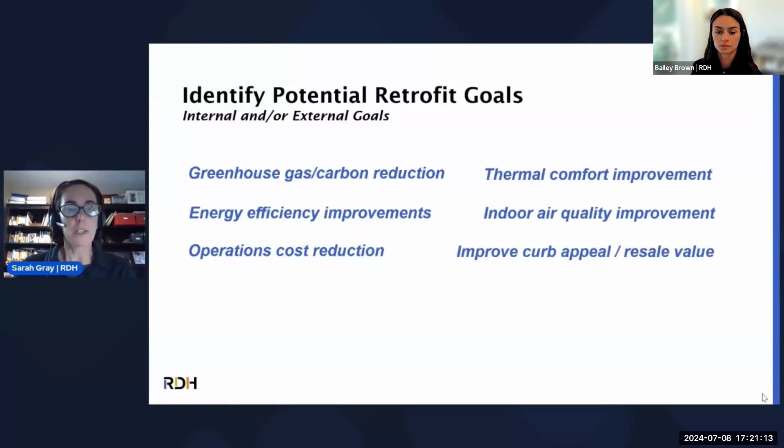There are some climate factors that Monty talked about earlier today. As part of a retrofit, we may want to build in fire or smoke mitigation measures. We may have the opportunity to conduct a seismic retrofit in those zones, and/or flood mitigation measures.

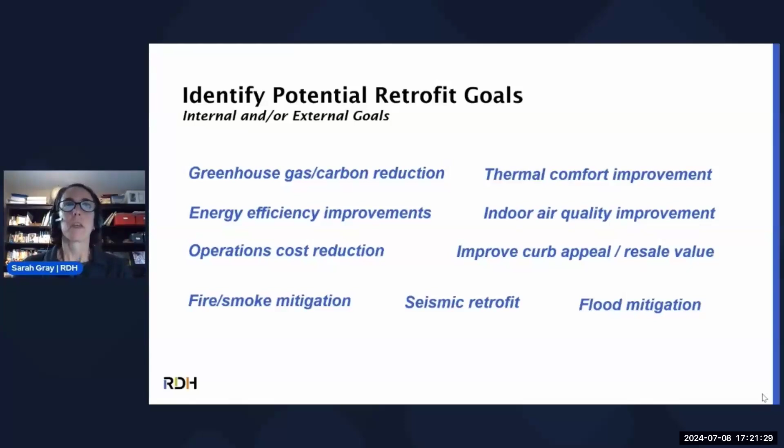So once we talk about those goals, we want to document them. It can be in any format. You could have a Miro board, you could have the little 2 by 2 3M sticky notes, you could have a document, a graphic, a poster, etc. But writing down your goals so that all stakeholders understand what the outcomes are, it's important.

These are some options for goals, and I'm by no means saying that you have to have all of these goals in every bucket or category, but these are ideas and options that we're hearing from our clients.

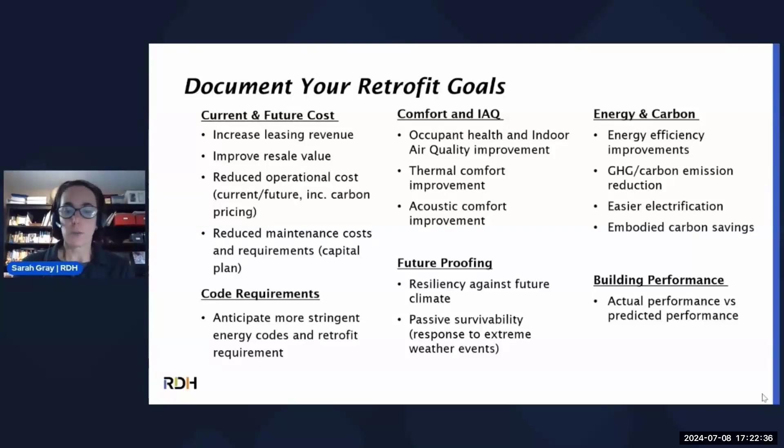The one thing that's missing from this list, and I purposely didn't want to put anything down, are the measurables. So increasing revenue by X%, reducing operational cost, or reducing greenhouse gas by X% or X kilograms equivalent carbon. It's important to put measurables against most or all of these goals so that there's something that can be measured and verified at the end, so that you know you're meeting not only your goals, but certainly those regulatory frameworks and BPS that Zach mentioned.

So writing that strong retrofit goal statement out of that initial planning exercise, those goals could be something like, I want to be net zero carbon by 2040 or 2050, depending on your local jurisdiction. You could have an interim goal of 50% greenhouse gas reduction by 2030, just 8 years away, and then moving towards net zero carbon in 2040 or 2050.

And you could put a big stake in the ground and take a big step forward. If you have a major retrofit starting soon, you could potentially achieve net zero carbon quite soon if you're taking a big, bold move in the near future.

We work with some clients that haven't yet had these strong goal statements in mind, and that's okay. Many clients come to us and say, Sarah, why don't you show me the potentials for reduced energy consumption or reduced GHGs, and then show me the costs, what the construction cost would be for a light, medium, or deep retrofit, and then I'll decide the goal.

Well, I think that's okay for an initial planning process, but as we've seen and learned about already today, the ultimate goals are going to be deep retrofits, deep reductions, moving toward net zero. So it's okay to understand the context of some light, medium, or deep retrofits and their associated costs now, but I think the writing's on the wall. At some point in the pretty near future, we're going to be going deep. So it's good to have that as an end goal in mind.

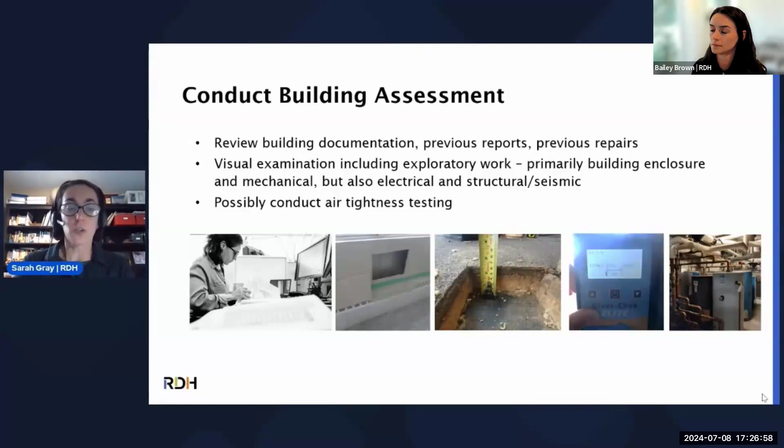Otherwise, we may be going to site to do some test cuts in the walls or the roof to understand insulation levels, detailing of any air barrier or vapor barrier that may be in those assemblies, looking at the windows, understanding glass type, glass thickness, all those kind of nerdy building science details. And then certainly understanding mechanical, electrical, and potentially plumbing systems in the building as well. All of the pieces that are using energy, reducing load, increasing load, opportunities that could be ripe for a retrofit.

All right, so Sarah here, she's just describing generally the start to an energy audit. So there was some pre-work for everyone today that talked about the various ASHRAE standard levels of audits as one option to inform a building retrofit plan.

Level 1 audits are generally no cost and low cost adjustments, typically looking at things like energy bills, possibly a brief site visit, but often looking at energy waste and kind of low-hanging fruit opportunities.

Level 2 starts to look at no and low cost adjustments and possibly digging further into improvements that fold in energy efficient measures that align with financial planning and capital intensive energy saving opportunities.

And then we kind of carry up to level 3 there, which is most aligned with more robust recommendations and financial analysis for major capital investments. So these audits look at monitoring, data collection, engineering analysis, much more in-depth kind of holistic look at all the building systems and the contributing factors to those emissions, as well as long-term planning.

And most of that is aligned with the planning process that Sarah's described here in that bigger picture perspective. So depending on the building's age and the general status of compliance with the emission limits, these audits can vary on level of intensity and are opportunities for a building owner to learn more about how they might improve their building and make decisions.

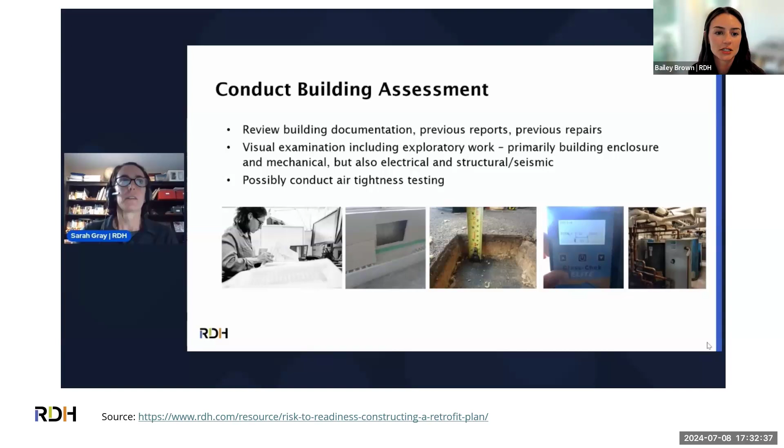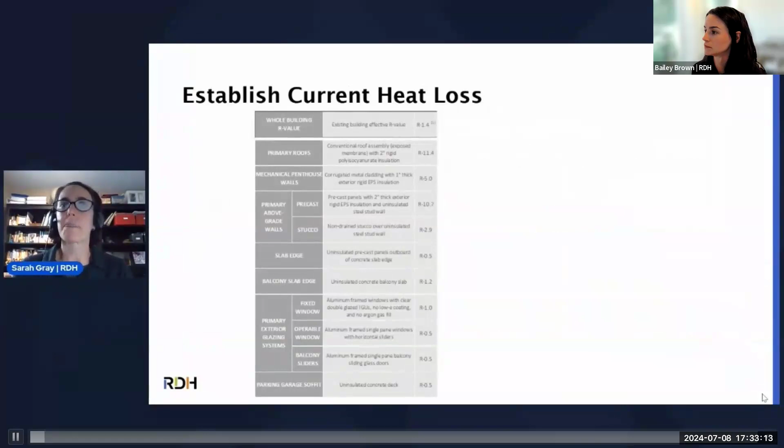We can turn that table of data into a more visually appealing graphic that shows the heat loss through the existing building envelope, typically in winter. Where I'm at in Toronto, we're a heating dominated climate, so we look at heat losses in winter and can see the impact of good or bad thermal performance of existing systems on overall heat loss.

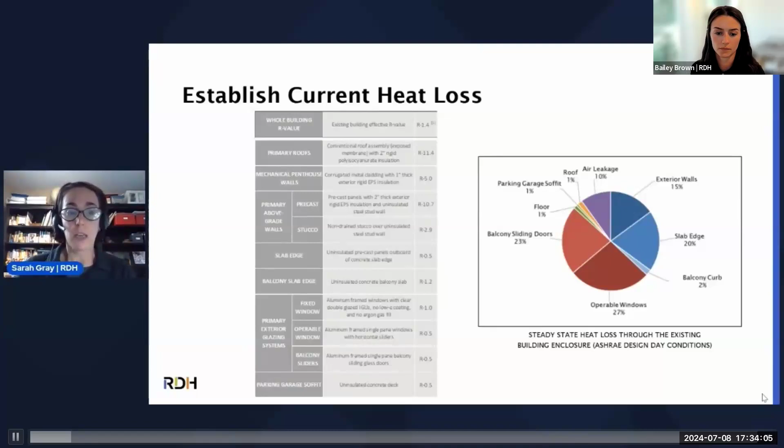Next, we take the information collected from those documents or our on-site review, and we baseline or benchmark the building. We look at electricity and natural gas consumption on an annualized basis - it could be an average of many years' worth of data.

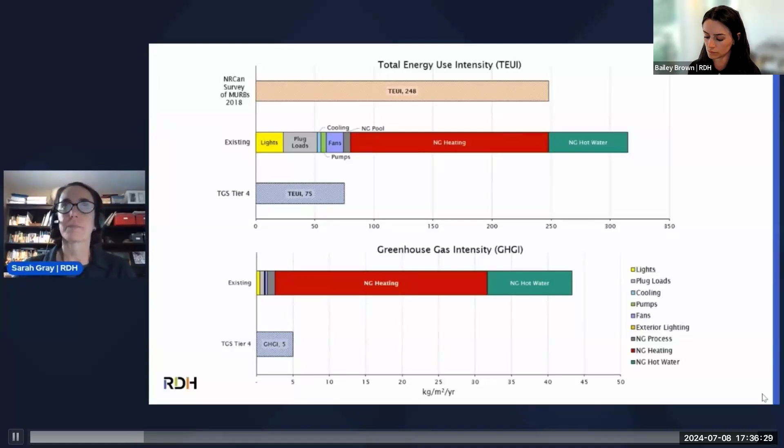Next, we have carbon reduction measures, which are reducing the greenhouse gas intensity. If we add insulation to our building envelope, we may need to use less heating, therefore reducing our carbon footprint. If we switch from natural gas or oil fossil fuel to electricity on a cleaner grid, that would be a carbon reduction measure.

And finally, we can have low carbon resilience measures, or LCRMs, which combine climate adaptation and climate mitigation measures. Those may also include flooding mitigation, overheating mitigation - we may be adding shading devices to mitigate climate impacts, those sorts of things. So not everything has to have a reduction for energy and carbon; we can also think about how we're adapting or mitigating climate impacts.

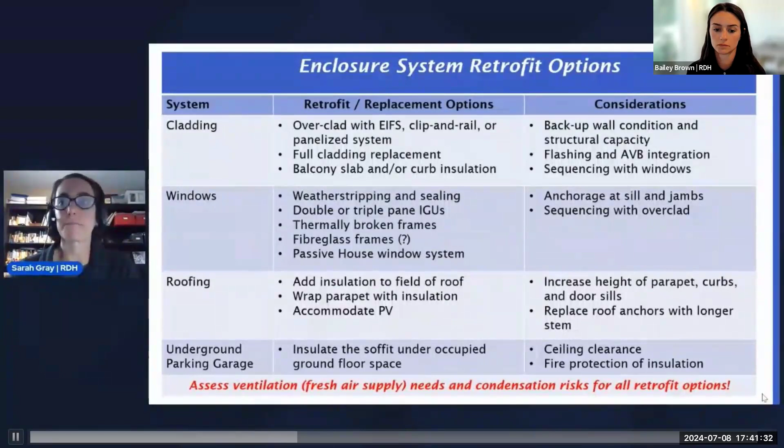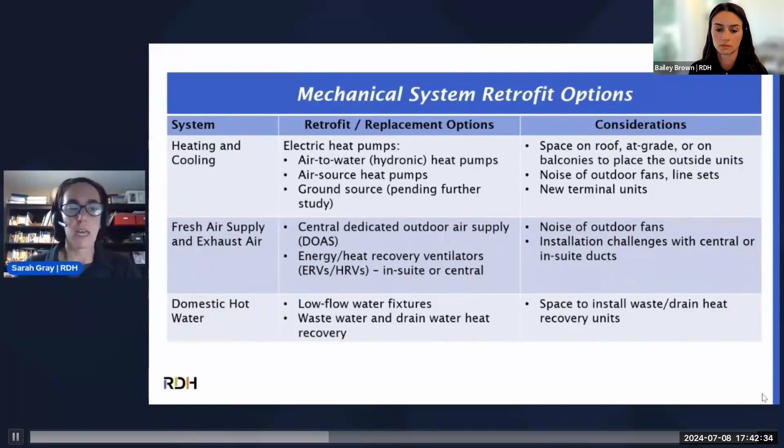For domestic hot water systems, the lowest hanging fruit is to switch to low flow water fixtures, so we're simply using less domestic hot water. And then on the back end, we can look at wastewater drain water heat recovery systems, which are copper coils around pipes or a central tank that captures the heat to preheat fresh water going back to the system.

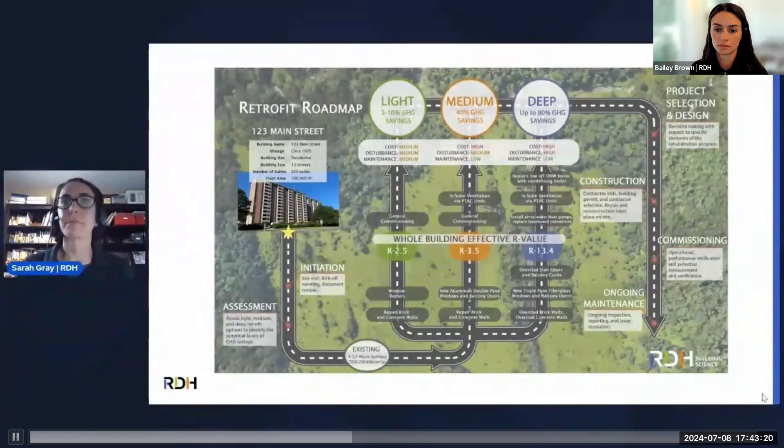So we're not just pretty pictures. We typically like to provide data to our clients who are interested in various savings numbers, those measurables that I talked about, to see if those measurables are aligning with the goals and the regulatory frameworks that are set out at the beginning of the study.

And as I mentioned before, deep retrofits with major renewal projects are typically going to be the only real option for implementation, or a final goalpost for implementation, when we're in a jurisdiction that is going to be moving toward a net zero carbon mandate.

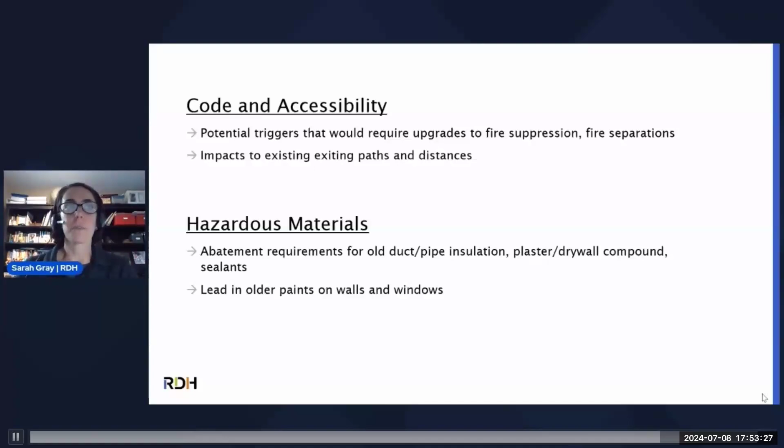Certainly think about impacts to residents and tenants. The key thing is to communicate, talk to residents and tenants about your plans to implement retrofit projects, what that means for their day-to-day life or work, but also the opportunity the retrofit project may present in terms of better thermal comfort and better indoor air quality. Town halls, emails, or newsletters are great. My colleagues Mike and Tammy will be speaking about this in a couple more sessions this afternoon.

So I want to touch a bit on retrofit planning for portfolios. All of the processes I just talked about tend to be implemented at the single building level at this point, but we're starting to think bigger. Although we may have these steps for a single building, the RMI 6-step process also applies to portfolios. We're just scaling up and grouping buildings together, or looking at an investor's portfolio across their scope.

So how do we go about that? What are the details and steps for looking at the portfolio? Well, certainly open up your portfolio list or your tool. You may have a capital expenditure program, a spreadsheet, or some sort of asset management system. Provide that to your team of consultants working with you on developing the retrofit plans. I'm sure there's a lot of great detail in the information you already have.

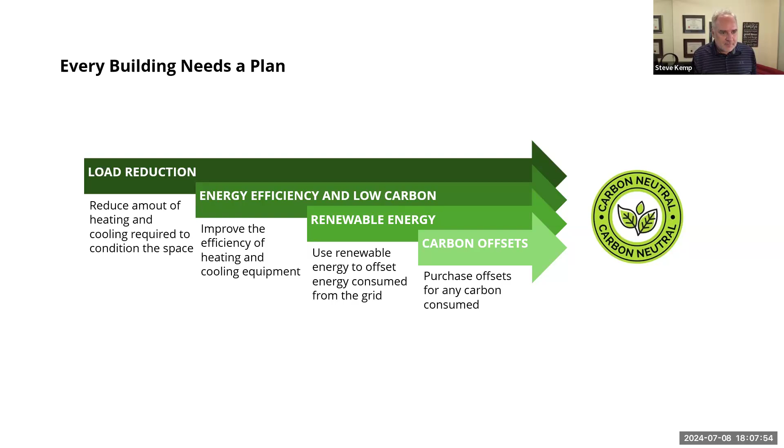So this was kind of our plan. To first understand, we looked at all the building drawings, we looked at all the building condition assessments, we understood what was the expected life of various building systems, how many more years they are expected to last before they inevitably need to be replaced. All buildings do need maintenance.

A lot of conversations with the facility manager, his name was Dennis, trying to understand what issues they were having, what places were they having issues with, were they having issues with comfort, any issues with odors, all those things so we could wrap them into a plan and improve not just energy and carbon, but the actual experience in the building.

And then we broke out that hourly energy simulation to try to understand how the building was operating currently. And that involved calibration as well, trying to get our inputs aligned in that model to what was actually happening in the building. I'll show you those results in a bit.

And then looking at those emissions, energy conservation measures and carbon reduction measures that Sarah talked about—what can we put together, and in what order that made the most sense? Not to, again, back to that sequencing thing. And then we did a full financial analysis for them: the life cycle costing of all these options over those timelines, to try to find them a path that they were comfortable with.

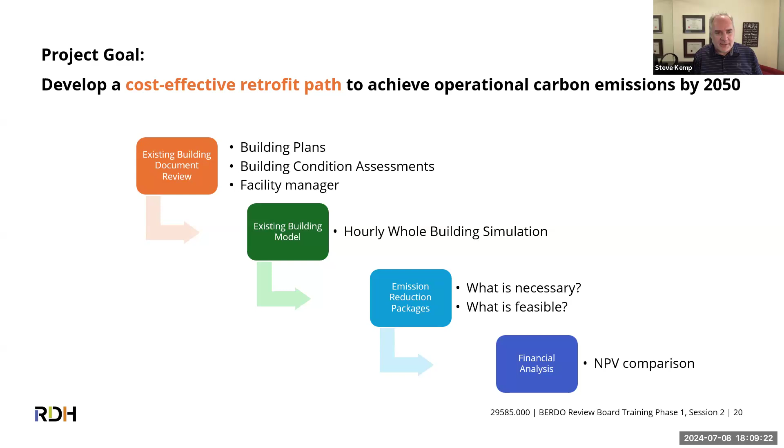Next slide. So this is that level 3 energy audit. The blue bars on both of these are the actual utility bills for their natural gas on the left, and the blue bars on the right graph. Again, the blue bars are their actual utility bills.

And then the other colors, the orange and the green, that's what came out of our energy model after going through a calibration process. So you put all your inputs in and go, oh wow, there's even less gas being used in July and August than we thought. You guys really don't use domestic hot water in this building. Well, it's an administrative building—there's no laundry happening, no dishwashing happening, no showers happening. So we were able to tweak a few things and tweak a few of the schedules based on what we learned from the facility manager.

To be clear, all models are wrong. The point is to get them to a position that they're useful. So they're never perfect, but we want to get them to a place that can help us decide what to do and in what order to do things.

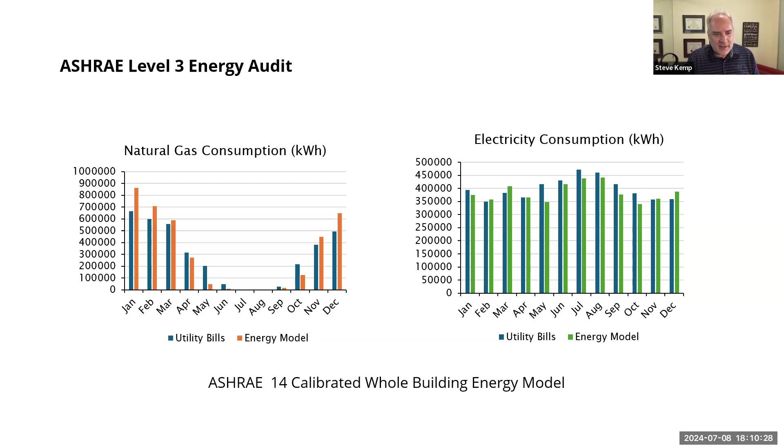Next slide. And then, just like Sarah said, we wanted to figure out where they are. So the colorful graph in the middle, second from the top, is their breakdown of energy use—lights, plug loads, they had a small data center in the building, so the server is that next salmon color. They had a little bit of electric resistance heating throughout the building, cooling, pumps, fans. The biggest one, of course, was natural gas for space heating.

The top bar is just, again, a comparison of where they are compared to the average administrative building. So they were doing better than average—they were happy to hear that.

The bar in the middle, third from the top, is where we think we can bring them to. This is total energy use intensity, how much energy they're consuming, normalized to an intensity so we can compare them to other buildings. We pulled a couple other ones—there's a zero carbon building standard that people are using for new construction. We don't think we can quite get them to that one; it's an existing building, and insulating the slab is not going to be easy. So we couldn't pull every measure at them because it was an existing building.

And now, just to make them understand just how good you could be, that last bar at the bottom is the passive house retrofit standard. That's about the best we know—the most stringent standard that's out there.

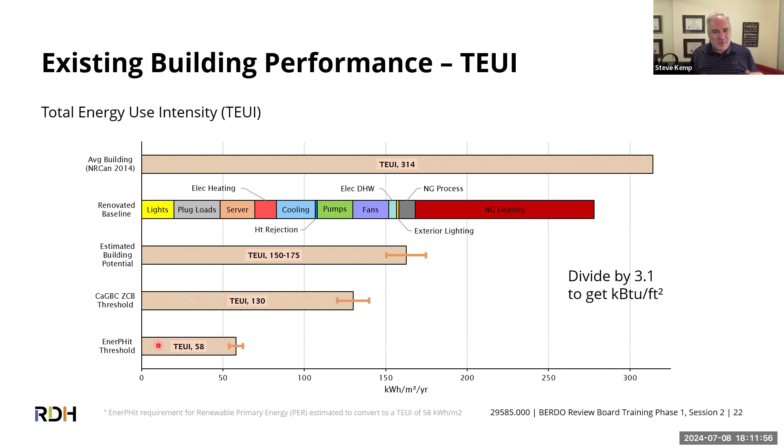Next slide. The other thing we wanted to figure out is the thermal energy demand intensity. So yes, bring that slide up one more ahead there. The thermal energy—if the biggest energy user in the building was that natural gas for space heating, it's like, well, what's causing that, and how do you understand the breakdown of that? Because it's not just the boiler, it's all the things you lose the heat out of the building.

So the very top graph, where it says walls, roof, infiltration, windows—those are all the heat losses in the building. If we heat our building in a cold climate, heat is leaking out the walls, it's leaking out the roof, it's leaking out through infiltration. This is just air flowing through our exterior walls, because they're not perfectly airtight.

The windows, and of course we have to bring fresh air into the building for air quality reasons—that's the ventilation. So the total of that is our total heat loss.

And so the next bar, we get some free heat from stuff—from internal gains, from people, from running the computers. All of us are 100-watt light bulbs giving off heat to our environment. And so that's the orange, the dark, and the blue at the far right of that graph.

So that's our free heat, and the rest is what we call the thermal energy demand intensity. This is the mechanical heat we have to provide to the building to make these two bars equal, because they have to be equal. And so that starts giving us an idea of what we really need to do to reduce that heating demand.

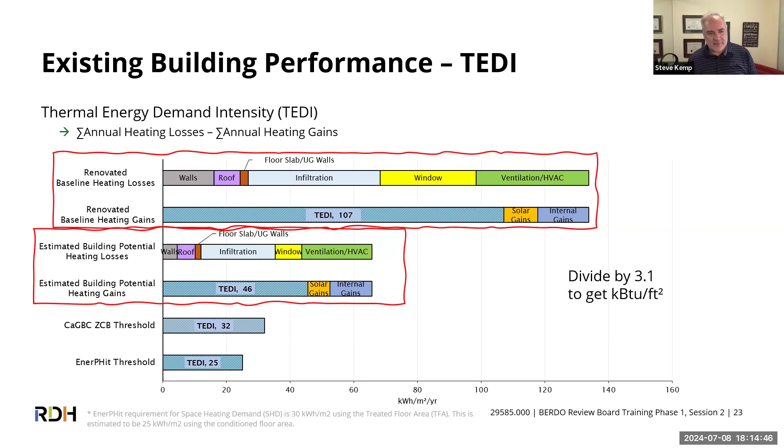For the enclosure, this slide is really just trying to point out how important windows are to heat loss. This graph aligns vertically—it's the R value of the wall and window system combined. For some reason we talk about walls in R values and windows in U values. But a U value is just 1 over an R value. If your U value is 0.25, that means it's R4.

Which means most windows are around R3, R4, and we stick them in R10, R15 walls. And we start saying we've got to add more insulation to the walls—well, but most of the heat's going out the window because it's such a low value. The existing building is where that X is in the middle there. It's about 40% glass, 60% opaque wall. And if you put the best walls in the world, you're going to raise your total building R value up to R6.

If we go all the way to an R30 wall, the best we're going to do is an R6 building, because we have these double-glazed R3 windows. But if we can go to triple-glazed windows and get into an R7 window, all of a sudden we can bring the whole building R value up above 10, which is kind of where we'd like to be in a cold climate. So this is one of the things we really wanted to look at—those existing windows we were about to replace—and said, please don't put another double-glazed window in there, put some triple-glazed windows in there.

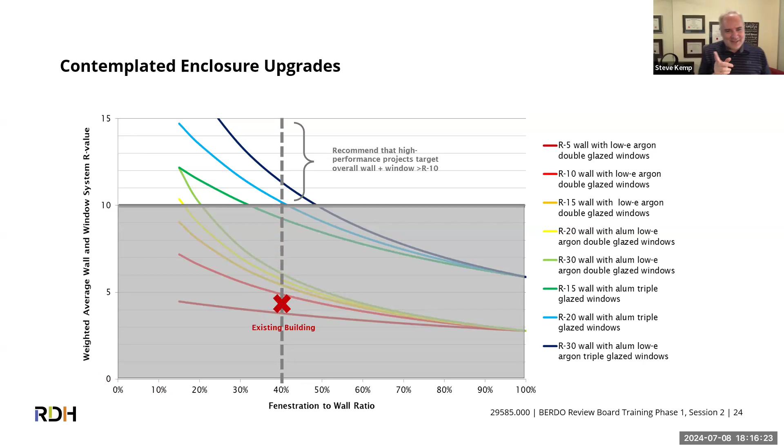And this is where we got into the problem. Yes, windows—as I said, the left side there, that's a thermal imaging camera. Basically anything closer to yellow is where the heat loss is, anything closer to blue is fairly well insulated, there's not a lot of heat loss. You can see definitely it's the windows that are causing the issues. A couple others—you can see some horizontal lines, that's thermal bridging in the opaque envelope.

Bailey's really good at understanding what I'm talking about. You almost like you've done this before.

So that's some thermal bridging, some metal, probably a piece of metal or something in the envelope that's letting a lot of heat through, bypassing the insulation. And on the right...

Top left, this is a cross section of the frame of the windows that were being used. That whole cross section, that's the frame. You can see the horizontal pieces. There's a double glazed window in there. And on the right would be the triple glazed version of the same. You can see we need a different frame to accommodate that triple glazed window.

So we're like, okay, fine, we can replace all the frames along with just the glass. Right now they're replacing the glass, so let's replace the frame and the glass. And then we looked at the drawings, and that's the bottom there. The vertical frame members are disappearing behind the opaque wall. So for us to replace the frames to accommodate the triple glazed windows, we would have to pull off the entire wall system. And the entire wall system has another 30 years of life in it.

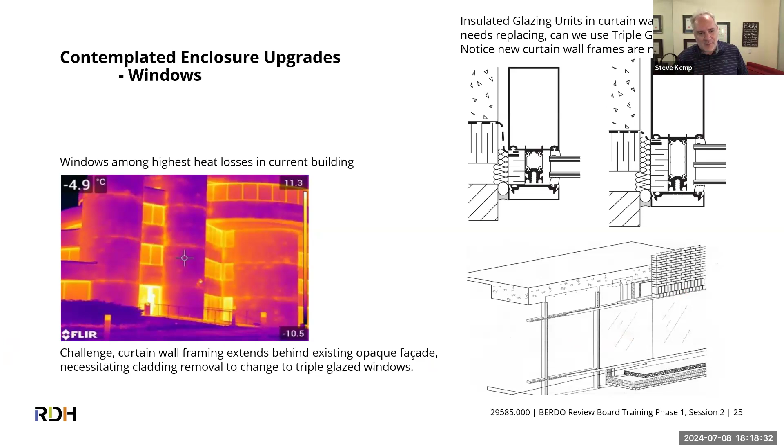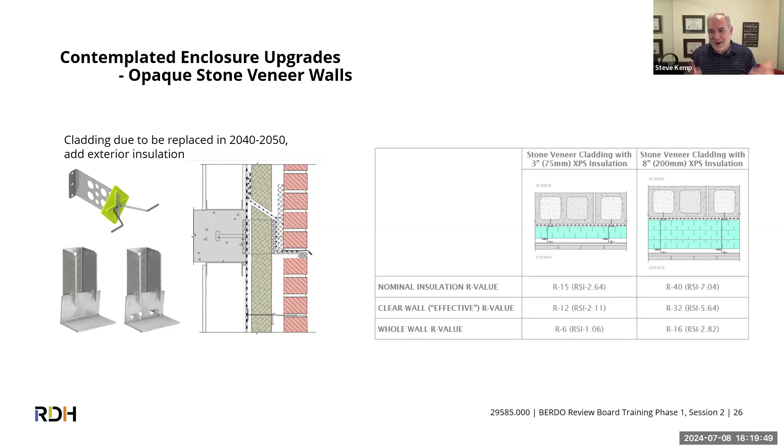It really impacts how much heat loss you have. So it's not always just about how much insulation you have, but how much metal stuff is sticking through the insulation. Basically, metal, aluminum, steel conducts heat 3,000 times faster than the insulation it displaces. So it doesn't take very much to really upset the apple cart. And you can see what's happening here, R40, but we get R16.

Next slide. The other places we were looking at thermal bridging was in the parapets, where the roof met the wall. You can see exactly where Bailey is indicating there's not a lot of insulation there. There's a lot of structural materials there, and structural materials conduct heat quite well. So there's a lot of heat being lost out through that parapet.

The bottom left is the recommendation of how to improve that, the day the roof needs to be replaced. So that's looking at 2040, 2050 timeline based on the condition assessment of the building. And the other thing, the very top right image, this building had lots of really nice skylights in the roof, bringing lots of natural light. The next image right there, again, that's a thermal image, but it was done with those dome skylights you see.

And you can see all the way out around the perimeter there, that was uninsulated. So again, we have an R40 roof, and all these thermal bridges are all of a sudden degrading that R40 roof down to like an R15 roof. Part of the thing was the day the roof needs to be replaced, it will need to be replaced around 2040, 2050. We didn't need any more insulation in the roof, but we would insulate around all those skylights per that detail where Bailey is showing, to reduce that thermal bridging.

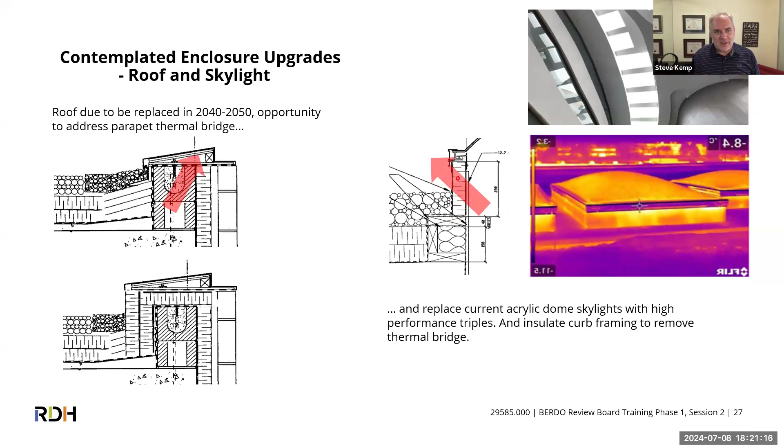Then we get into the ventilation. The building was what's called a dedicated outdoor air system. Basically, it provided ventilation through ductwork to all the spaces, and then completely separately and in parallel, it had these fan coils that provided heating and cooling to all the spaces. But it had no energy recovery on it. So basically, you got to exhaust all the pollutants from the building. People are the number one source of pollutants in most buildings, so we're mostly exhausting our smells, and we need to replace that with fresh outside air. And that costs a lot of energy to heat and cool that air.

But when the air is leaving the building, we can run it through a heat recovery ventilator up on the top right, and basically recover some of that heat and reduce the energy consumption of that ventilation.

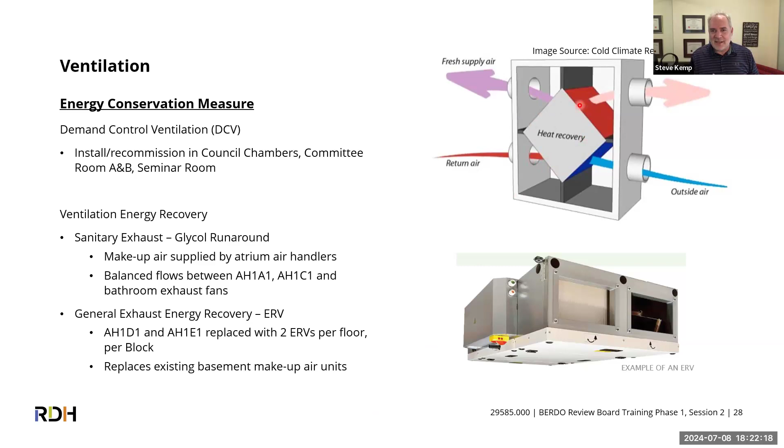So we looked at a few different options, including glycol runaround loops. We found a spot in the building, a service room that wasn't used very much. It had good access to the existing ductwork, and we deemed it was possible to go through the walls and bring in fresh air and exhaust air at each floor. So it's not one big large HRV for the building, it's about 12 of them on a per floor level, or two per floor.

So that was something, again, looking at it, investigating the site, having the mechanical engineer look at it and go, yeah, this will fit in this space. We have access to the existing ductwork here. We need a couple holes in the wall, but that can be dealt with. And it was something that was able to work out, and it was a realistic solution.

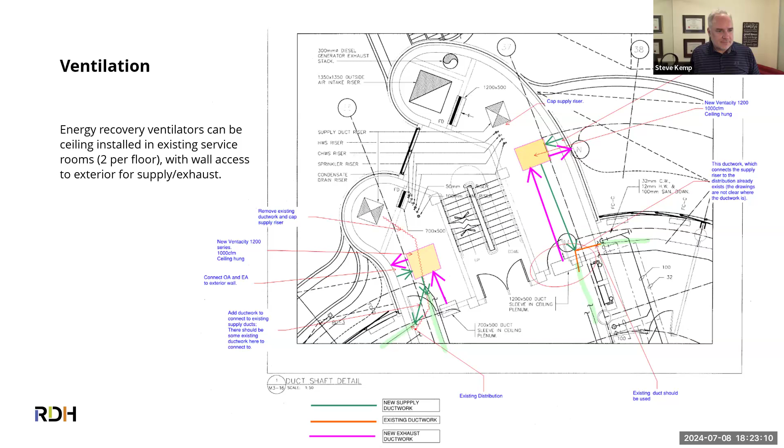And then, as I mentioned, our building was heated and cooled with local fan coils. The nice thing about local fan coils, if they're two-pipe fan coils, and they were, the coil inside is sized for cooling, which means it's oversized for heating.

And that's important because when we go from the current boilers in the building to heat pumps, we're significantly changing the temperature of the hot water we're heating the building with. The old boilers were using 180 Fahrenheit water. The heat pumps today, air-to-water heat pumps, only produce about 120 Fahrenheit. But because all these fan coils were sized for cooling and thus oversized for heating, they were compatible with 120 Fahrenheit. So this was a real lucky break for us on this building, because other buildings we'd be looking at completely replacing all the terminal perimeter heating. But in this case, it was already compatible with it. So it was a really lucky break that controlled the cost of switching over to heat pumps.

And then in the picture there, we're kind of showing, yeah, it does fit on the roof. We actually have drawings with the dimensions on it, but these heat pumps could fit on the roof. They could also fit in the backyard of the building at the ground level as well.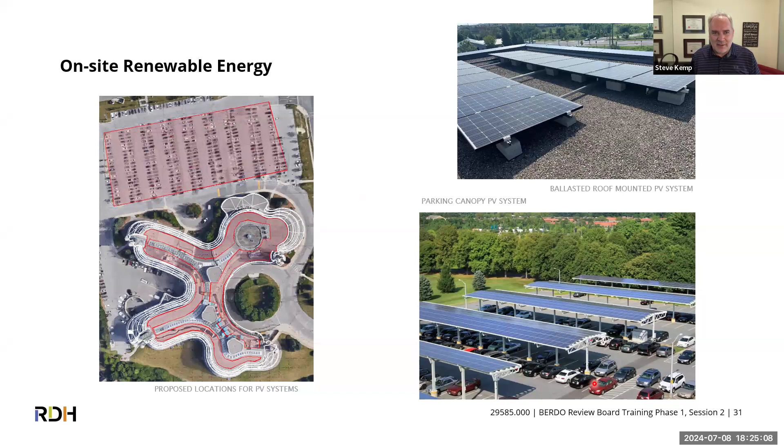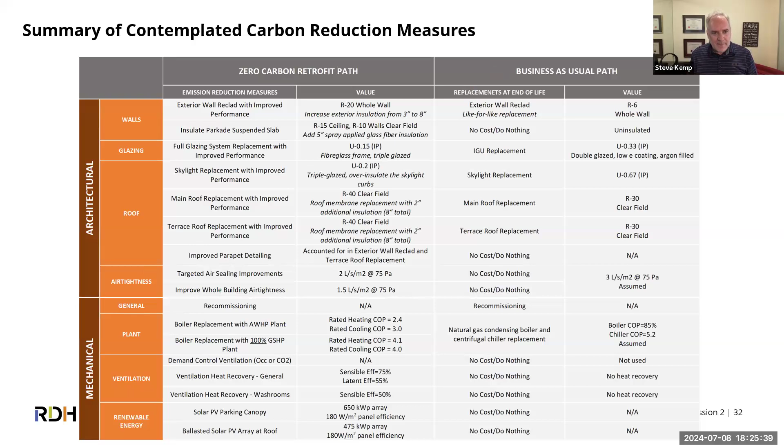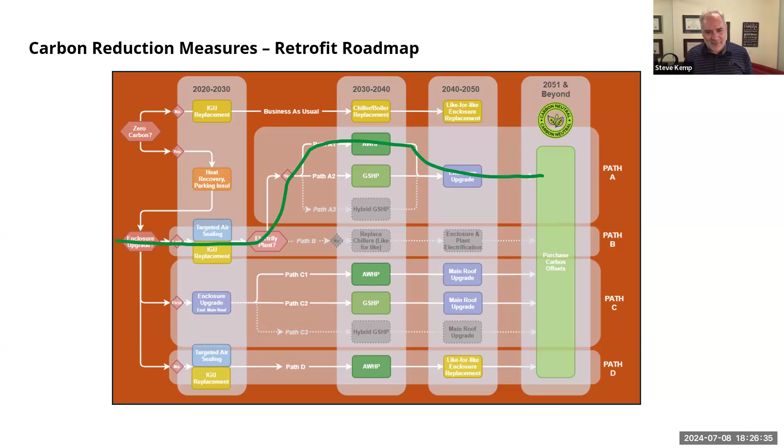There's a couple of these where we did look at doing that full envelope upgrade now. Remember we said to replace the windows with triple glaze glass, we'd have to replace the entire wall system as well. So we did look at that option, the enclosure upgrade now. Anyways, the one we're showing is the path that was actually chosen, and we'll show you why in the next slide.